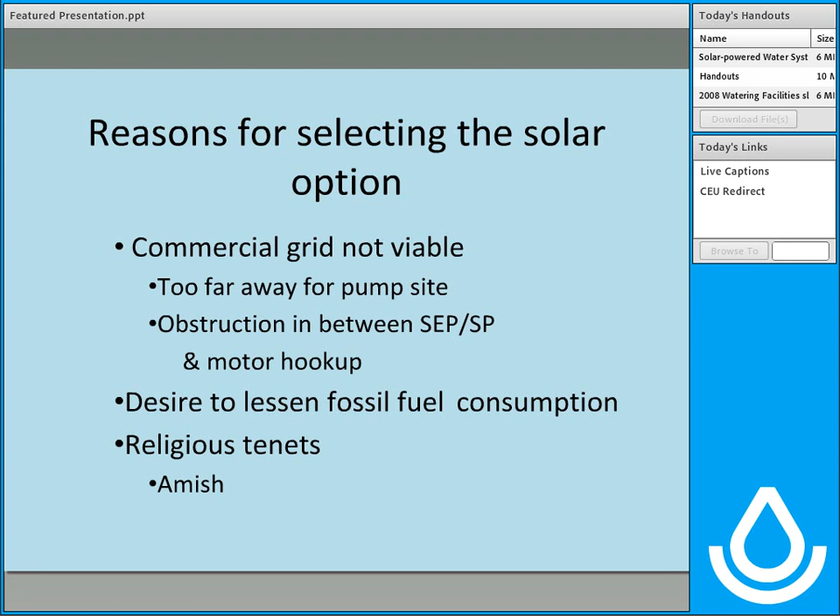Cost break point was about 1/3 to 1/2 mile from the grid back in 2004 for New York State. Depending on what the prevailing electric rates of the local utility that serves your farmers, the capital expense of conventional pumping or gravity feed options, and the cost of solar-powered alternative, a cost analysis can reveal the economics of that particular option.

There are a number of key points that I want to make right at the beginning. First of all, like so many of the other alternative ways of providing water to livestock, but particularly with solar, it's much more costly than traditional approaches. Also, in particular with solar, we only have a relatively brief window of opportunity in which to capture that energy and make use of it.

So with the cost and some of the other challenges that face solar, it would be worthwhile to explore the more traditional options where they can provide livestock water on at least some of the acreage in the grazing system, and reduce the need for solar as much as possible.

Because solar is heavy on the technology, there's always things that can go wrong. And with that in mind, just as with other problems on a grazing system like drought or flooding, having a contingency plan for when the system is down is certainly worthwhile.

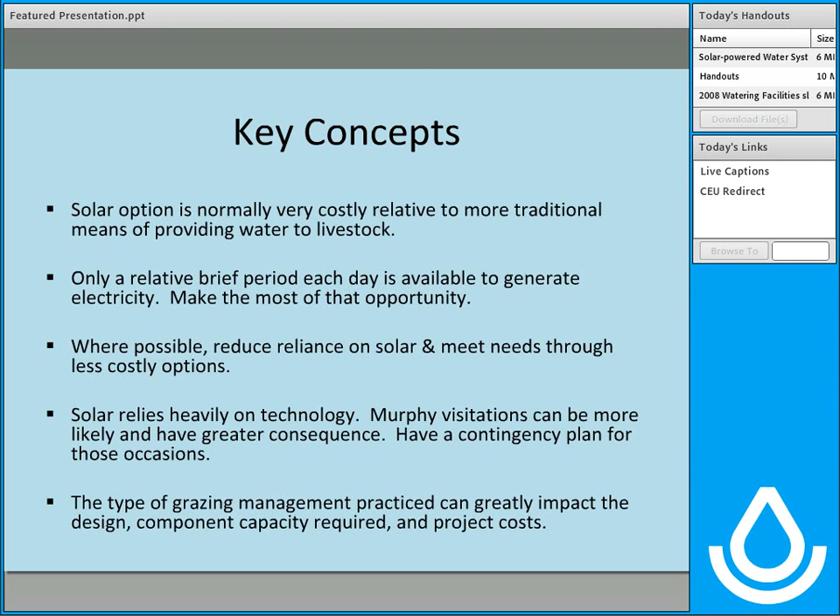Kevin will get into this in more detail, but recognize that the type of grazing management that is practiced really impacts the design, component capacity required, and the overall cost of the solar option.

Trying to find a suitable site for a photovoltaic array takes a lot of things into consideration. Perhaps the most important is finding a spot that's unobstructed to the south horizon. Obviously shade on the photovoltaic array is a major problem. Whenever there's some shadow cast on the surface of the array, that reduces the overall output.

Another issue to consider is the exposure, or the amount of wind that might be expected at that site, because wind on the array puts a lot of mechanical stress, which leads to premature failure due to fatigue. In addition, the distance between the array siting and where the actual pump is placed is also important due to avoiding voltage drop in the wires.

Most of the time it's a DC powered motor, and with DC applications, voltage drop is a major consideration. Unfortunately, due to the required exposure and prominence of photovoltaic arrays, they become easy targets for foul play. Finally, the photovoltaic array mounts mandate a solid foundation to keep proper orientation to the sun, so soil characteristics like depth to bedrock or other restrictive layers can make this problematic.

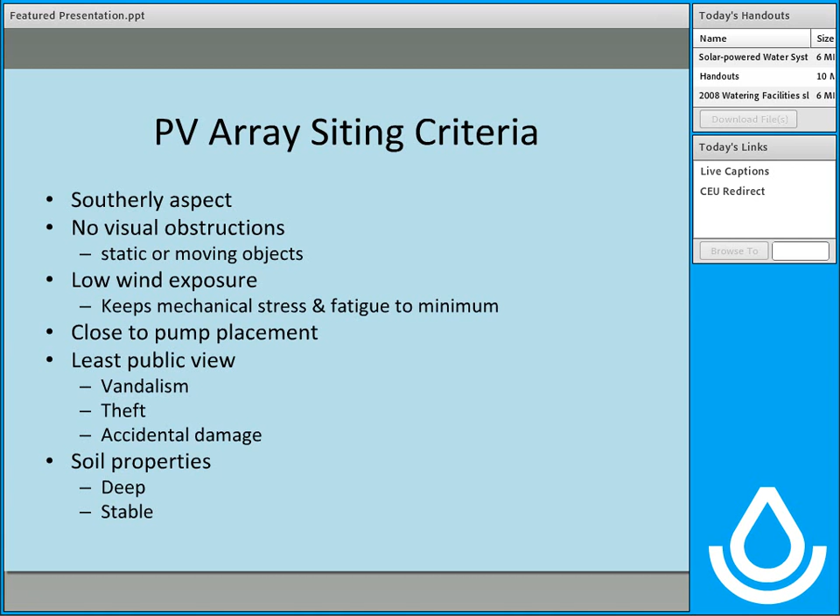As far as positioning the array, you want to try to have the surface of the array perpendicular to the sun as much as possible and as consistently as possible. So there are two considerations there: one is the elevation, sometimes called the tilt or altitude, and the other is the azimuth or the compass bearing.

There are various ways to position it. Most commonly used is the fixed frame, either on a post, a ground mount, or sometimes on roofs. Those are some of the ways it's actually placed, fixed to a solid foundation.

The angle on a fixed frame usually is adjustable manually, and in the summer for our part of the country, it basically equals the latitude minus 15 degrees. In the winter, you basically add 15 degrees to the latitude. This is the least expensive approach to mounting the panels, but it's also buffeted by winds because of a solid setting.

There are opportunities to have trackers installed onto the array that will potentially increase the output somewhere between 40 and 45%. So the amount of modules that need to be procured to drive the pump may be reduced accordingly. They're not as beneficial in the winter months as they are in the summer months.

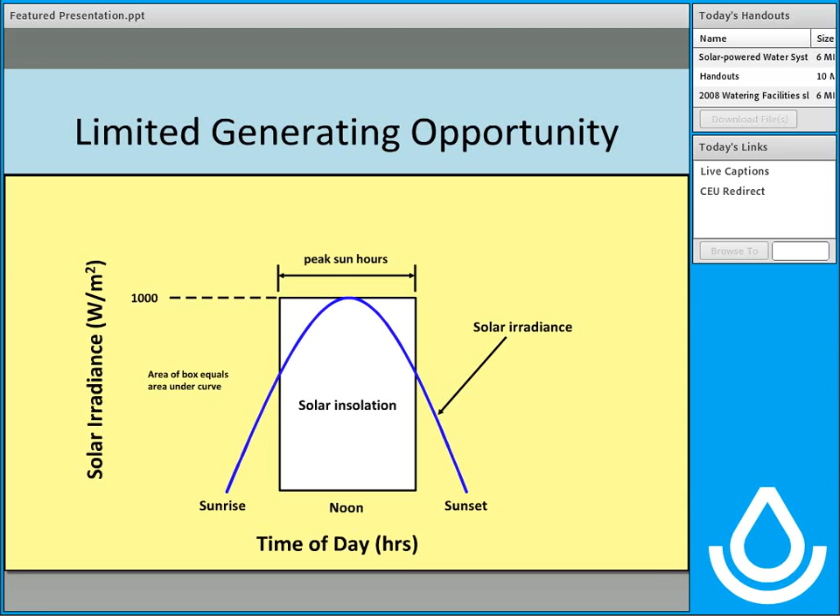This graph illustrates some other concepts to take into account. At any given location, the amount of solar energy reaching the ground or a photovoltaic array on a sunny day varies uniformly in a predictable diurnal pattern. Under these conditions, maximum solar radiation is received.

However, when continuous and uniform cloud cover, considered overcast, filters out the full sunshine, significantly reduced radiation is received in a pattern mimicking clear days, but with reduced output. On days when intermittent or scattered clouds exist, sunshine at ground level is highly variable in intensity and duration.

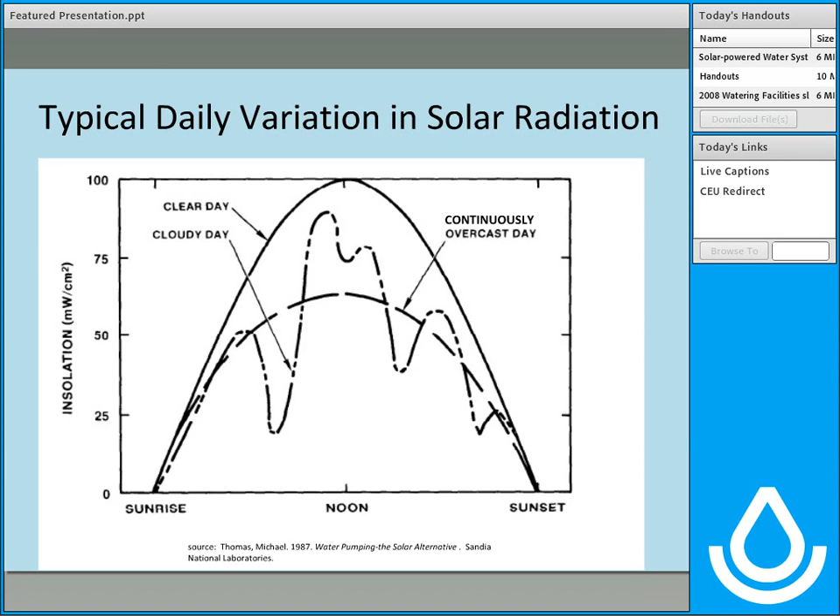The different approaches used have some bearing on the total project, recognizing the limitations of solar pumping. Electric power is only generated for a small portion of the day at best, and at minimum, many hours separate each generating period due to the diurnal nature of sunlight. Cloud cover can further diminish daily accumulated energy reaching the photovoltaic array.

There are two basic approaches that bridge that gap between demand and service. The battery option is one. It has the potential to reduce the size of the photovoltaic array and pump capacity that may be needed. However, it has many downsides. First of all, it is a high maintenance issue.

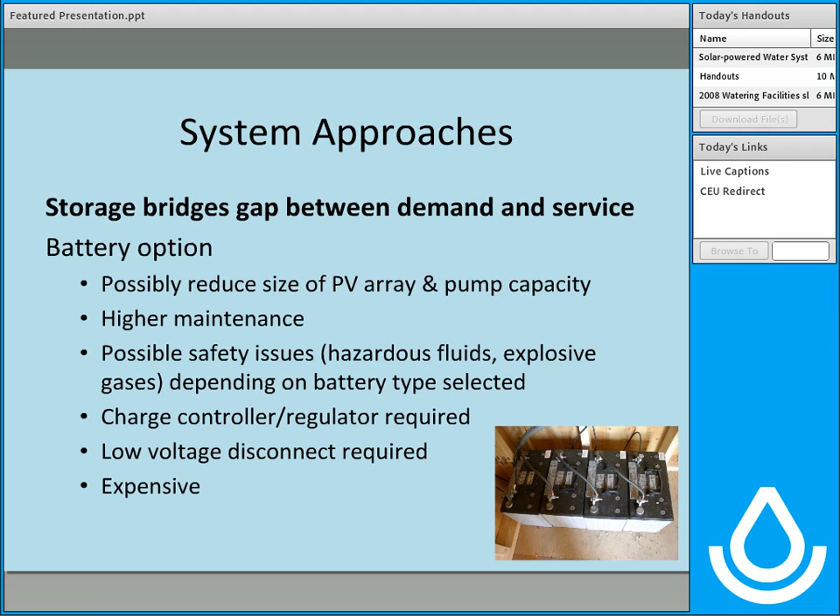There are possibilities of safety issues due to hazardous fluids and explosive gases under certain circumstances. A charge controller or regulator is an additional component required in that situation, as well as a low voltage disconnect item. Overall, this results in a significantly expensive option.

The approach used more commonly in grazing situations is to establish a gravity feed storage tank. That requires the storage or reservoir be positioned very high on the landscape, especially relative to where the dispensing points in the pasture are for offering water to the livestock. That may require significantly more pipe, going up to the storage and then out to the distribution to the various paddocks where water is provided.

Another issue with storage is if sunlight can get through the tank itself, like this polyethylene unit shown here, that may create algae, which reduces water quality, may have health concerns, as well as possibly plug up the float valves. But with all that taken into account, this is a significantly lower cost alternative if the terrain permits.

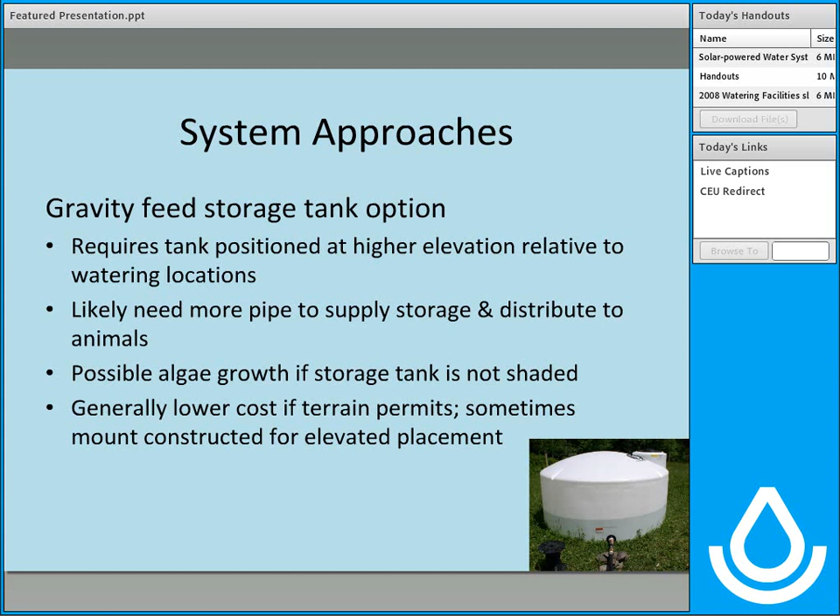In a few instances, when there hasn't been a lot of difference in elevation, the farmers and contractors have actually created a mound to slightly elevate the tank just to get this particular option working.

The duration of service has a significant bearing on the design and construction of a livestock watering system, whether it's a photovoltaic array or a more conventionally pumped scenario. The most common scenario serves livestock only during the growing season, which is simplistic and allows pipelines to be placed on top of the ground where they're not subject to physical damage. However, many graziers are trying to extend the grazing season at both the early and tail ends, which may require extra techniques to get by on colder days. The most challenging scenario is when water is required 12 months of the year, maybe not so much in the south, but in the north where there's freezing weather and snowfall.

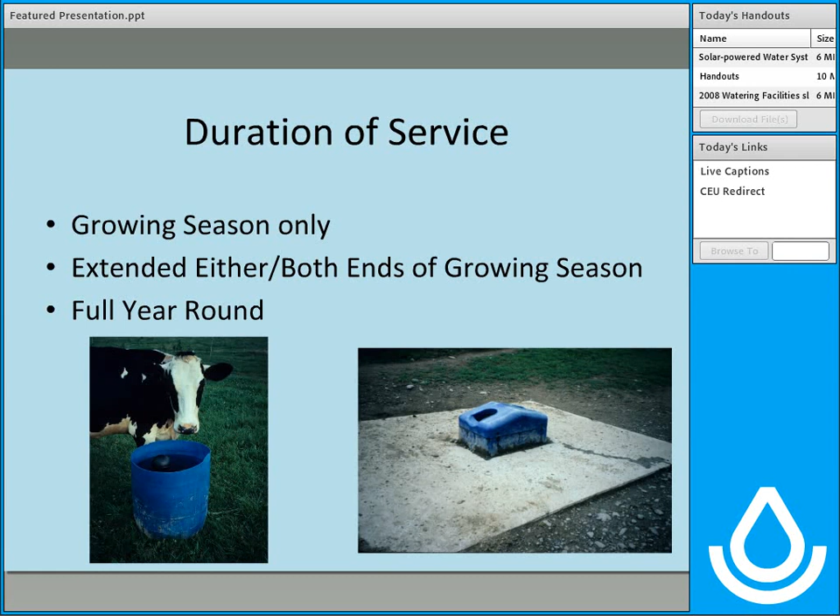There are different components used to activate the pump, turning it on and off as necessary. Perhaps the most common is the float switch, especially when there's water storage. It's a very simple device that sends a signal back to the pump controller when the storage tank needs to be refilled or recharged. Another alternative, more traditionally used in grid-powered pumping systems, is a combination of a pressure switch and a pressure tank.

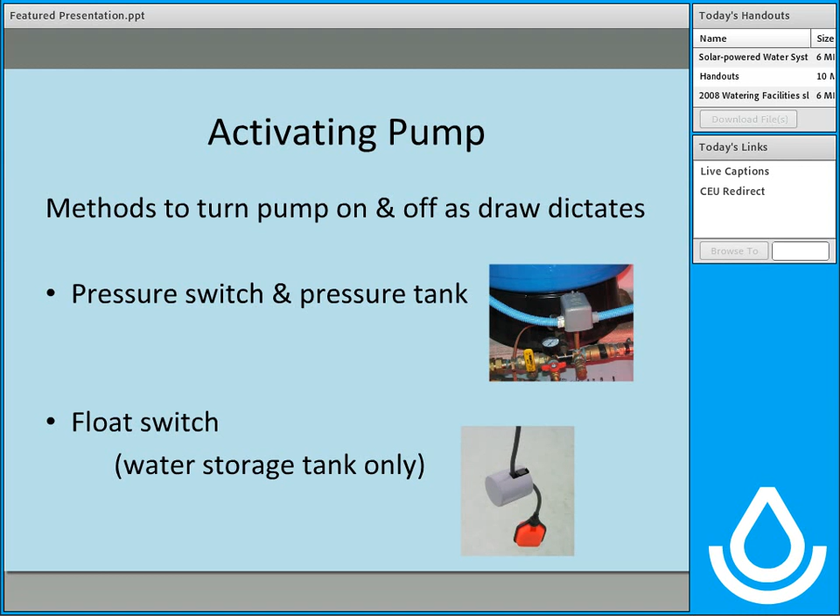Some terms to help familiarize you with components in the industry: the smallest unit of generating electricity for photovoltaic arrays is the individual cell. Those cells are combined into a flat, usually rigid surface called a module. A number of modules may be combined to form a panel, and multiple panels may ultimately create the actual array.

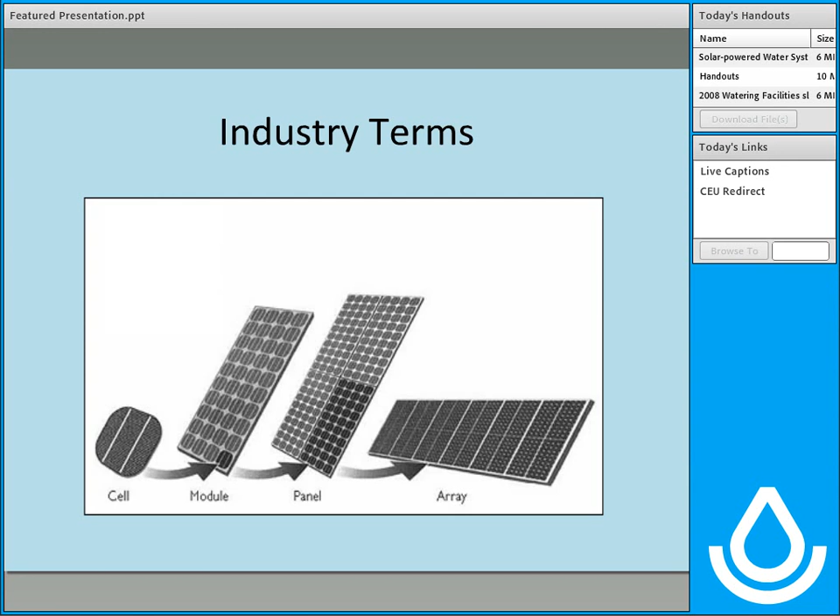The different types of photovoltaic materials are basically in three categories, plus a fourth that's a combination of two of them. The first is monocrystalline, which is the most important because it's the most efficient at 15% efficient—which doesn't seem like much, but compared to the others it's much higher. Multicrystalline is a little less efficient, and then there's amorphous or thin film, which is less than half the efficiency of the others.

Other components you should be aware of include the pump controller, sometimes called a linear current booster, or LCB, by contractors and installers. It's basically an electronic interface between the photovoltaic array and the pump, and it matches the output of the array in terms of voltage and current to the pump to make it work most efficiently.

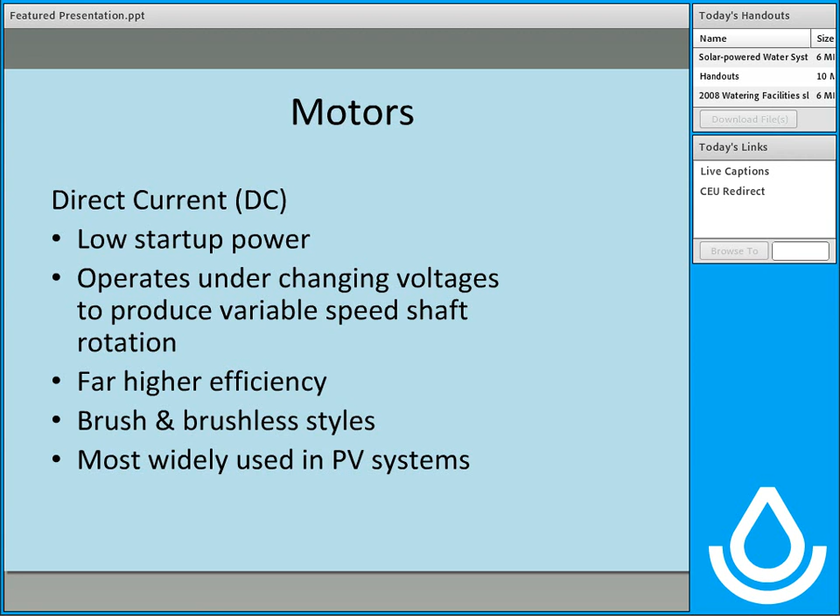The more traditional motor used in photovoltaic pumps is a direct current type motor, characterized by low startup power, operating under varying voltage to produce different speeds of shaft rotation, with much higher efficiency. There are two versions: brush, which requires higher maintenance to replace them as they wear down, and brushless, which is perhaps the more common style in components these days.

The pump environment is basically categorized in two situations. You can have a surface-mounted pump where it obviously has fairly easy access for both installation as well as maintenance and repair. However, depending on where it's actually situated, it may be more vulnerable to freezing damage if it's not protected and exposed to that kind of climate.

It also requires protection from livestock, wildlife, and the elements. When it draws water to the intake port, the suction is limited to basically 22 feet maximum. Submersible pumps, however, are immersed in a column of water, so getting to the unit for installation, maintenance, and repair is more involved. However, it's generally protected from freezing if that's a concern, as well as protected from wildlife, weather, and livestock. And suction is not an issue, since it's right in the column of water.

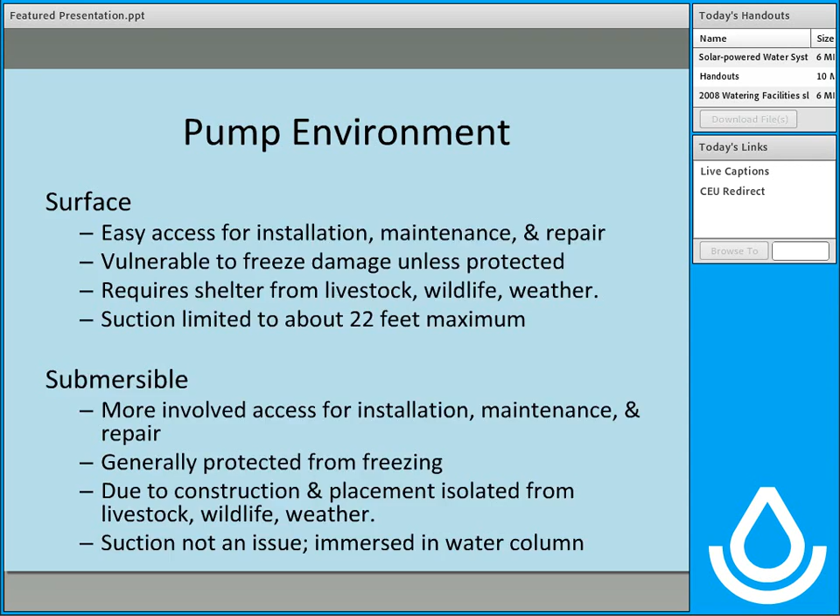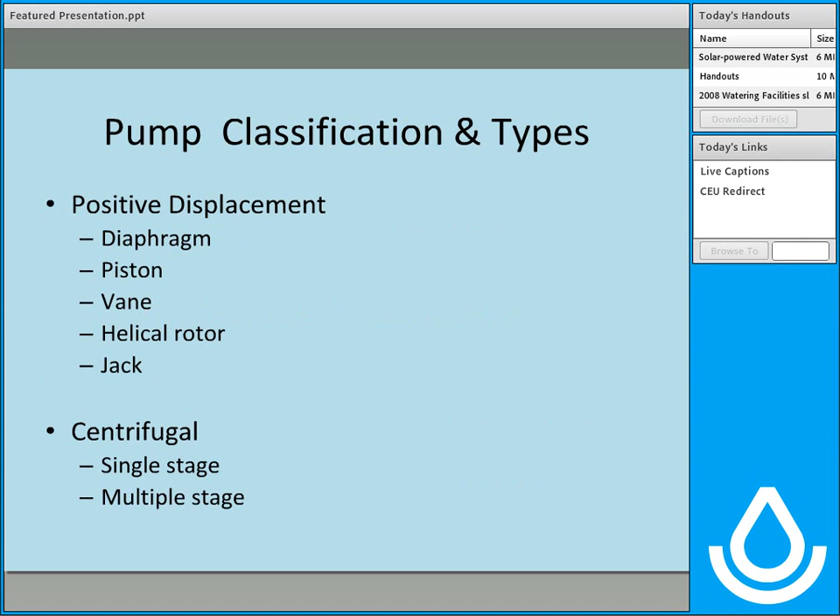As far as pump classifications and types, there are two categories: positive displacement as well as centrifugal. You can see the different pumps that come in through that, and we're going to go through those very quickly.

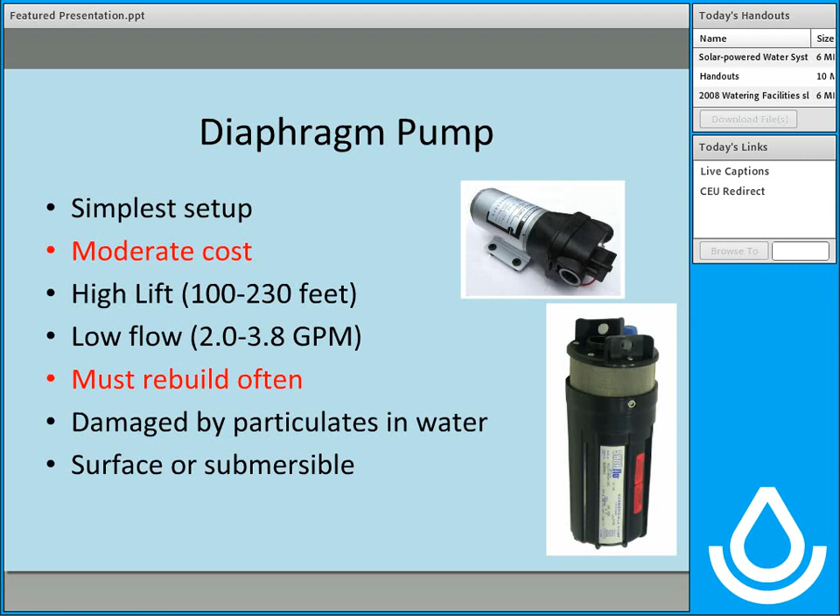For photovoltaic array situations where you're pumping water, a diaphragm pump is perhaps the simplest setup. It's moderate cost, and one of the major drawbacks is the diaphragm, because there's a lot of fatigue on that component. It has to be replaced, so you have to rebuild that portion of the pump very often, normally every 1 to 2 years.

A piston pump is another option for positive displacement pumps. These are significantly higher cost than the prior option I mentioned. However, they are very durable and reliable, with a great track record. They're also very tolerant of dirty water, and of all the pumps available, they are the most efficient in terms of moving a gallon of water with a set amount of energy.

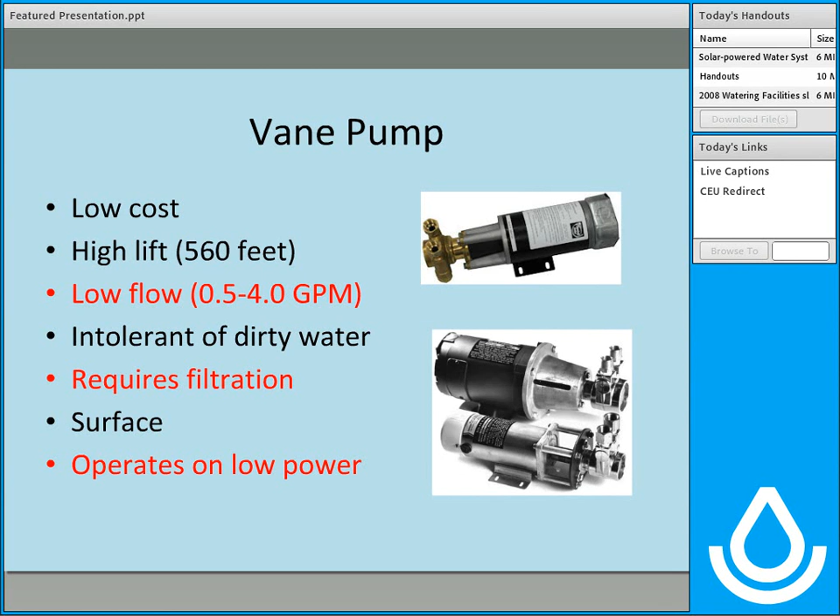Vane pumps have the characteristics, unfortunately, of very low flow but fairly high lift. One of the major other drawbacks is that it absolutely requires filtration - it's extremely intolerant of contaminants, sediments, and particulates. On the positive side, it can operate on very low power when you have a cloudy or overcast day.

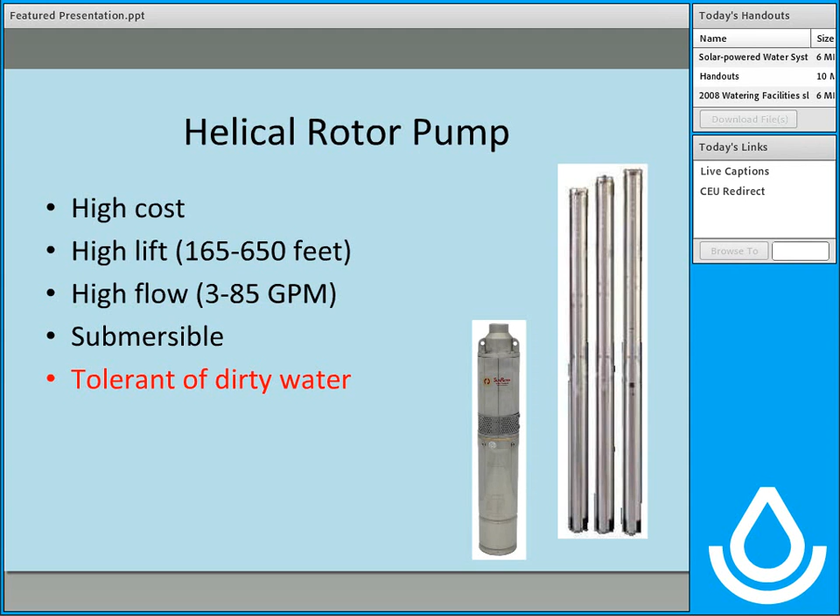Helical rotor pumps are kind of unusual for normal pumping situations when connected to the grid, but they're actually fairly common in photovoltaic situations. They allow for a very high lift and pretty good flow. They're tolerant of dirty water, and most traditionally they're offered in submersible versions.

Centrifugal pumps are moderate to high cost. They have fairly low lift, but one of the things where they shine is very high flow. Unfortunately, on the flip side, they're fairly low in efficiency in moving water relative to the amount of power provided.

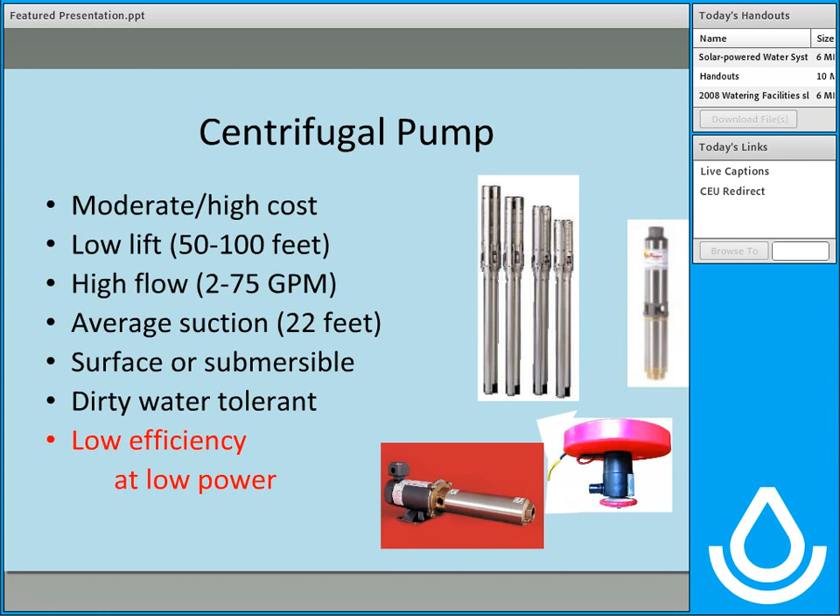Lastly, I cannot overemphasize the O&M aspects of any conservation practice, but in particular for photovoltaic pumping stations, there are some extra features to consider. One is, of course, trying to avoid reduction of sunlight getting to the photovoltaic array. When you have accumulation of dust, foliage, or other debris on the surface, over time that will dramatically impact and lower the output of that array. So consistently cleaning that is ultra important.

In addition, inspect all the wires and cables for any potential damage, and make sure all the bolts and other fasteners are tight on the frame or the tracker, because if they're not - due to wind or some other impact - the unit is not operating at top performance.

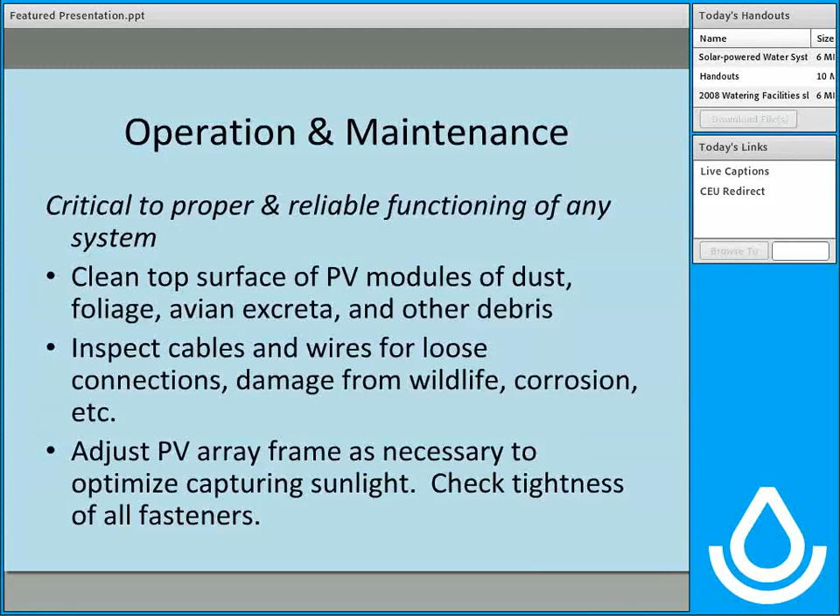When do you need fixed tilt, and does that change during the growing season, or just from summer to winter? The question, if I understand correctly, is basically about the passive tracker and how it works.

There are these wings on either side of the mount for the array, and behind them, just below the wing, are cylinders filled with fluid. They're plumbed and oriented so that as the sun shines on them, usually on a black surface, sunlight hitting the dark surface changes wavelength and heats up that container of fluid. As it heats up and expands, it moves through the plumbing to shift the weight of the array from one side to another, automatically tracking the sun.

That, however, is a single-axis type of tracking. It's not a double-axis. It will only track the sun throughout the day, from sunrise to sunset.

Is it the tilt—orienting that to the sun in summer versus winter, or would you want to vary the tilt during the growing season? That would certainly optimize the capturing of sunlight onto the array. Depending on the particular array, on a fixed mount it can be somewhat involved, but the more often you could do that, maybe every month, would be beneficial. At the very minimum, do it at either end of the season.

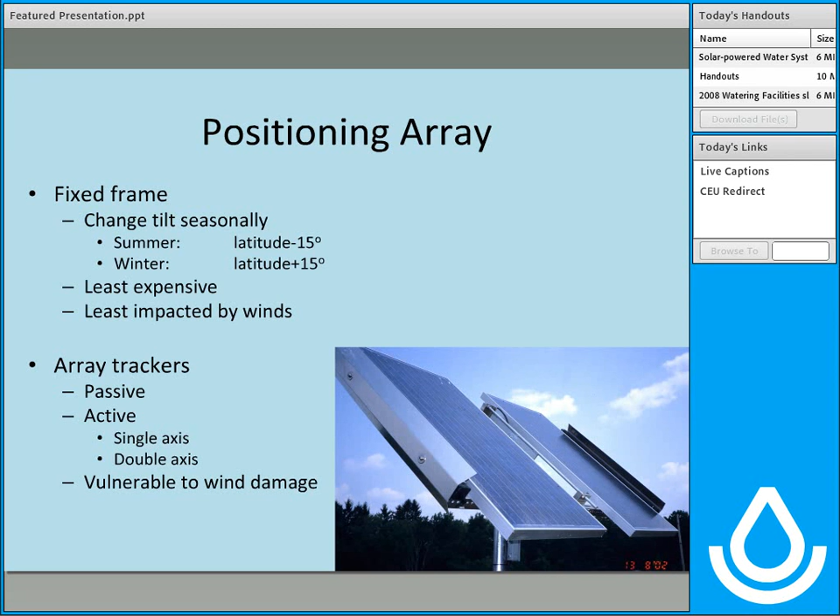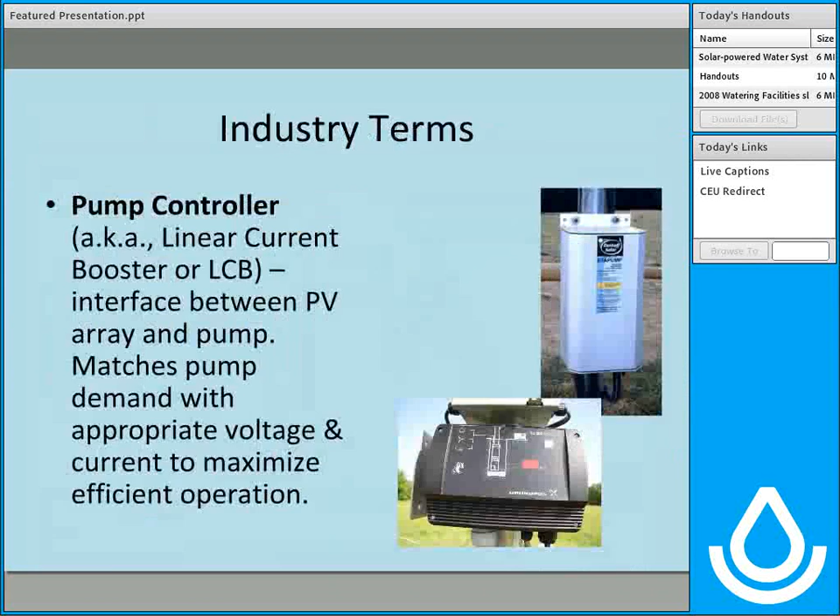Okay, a couple more questions. We've had a lot come in, trying to pick out some connected ones. So, regarding the number of hours per day you could count on sunlight producing enough energy through those PVs—if you had a fixed array, would that give you fewer hours of operation versus one where you could vary the tilt, even during the growing season?

Maybe not so much fewer hours that it would pump, but it's the output of the pump itself. Early and late in the day, the angle the sunlight strikes the array surface, if it's in a fixed mount position, obviously isn't as great as at noontime. So the panel will produce some output, but nowhere near what you have at high noon, and the pump will operate, but not at full capacity. That's why tracking usually increases the total output during the day versus a fixed mount setup.

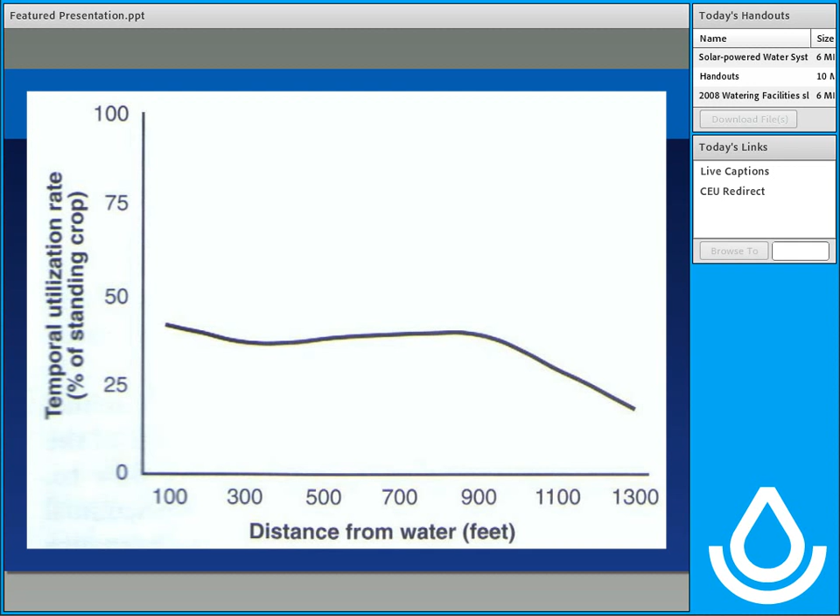There's also some studies done on dairy with GLCI funds that showed those impacts with lactating dairy cows, that distance is probably much shorter, in the 400 to 500 feet range, since those animals need a lot of water. So those are really important facts that we need to keep in mind as planners when we're doing design work.

If we stay within these distances or less, 2 to 5% of the herd is going to come at a time, and we can calculate that, and Jeff's going to go through an example here in a little bit. If we're greater than those distances, we're going to have a lot more of the herd coming at one time. There's been documented cases where, if you get far enough away, the whole herd's going to come to the drinking water source. So obviously, how many animals are going to be drinking at a time is a big impact on our design.

So here's, again, some facts we've shown before. We can figure about 6 gallons per drinking event. We want to stay on the high side in our calculations, and there's 2 to 5 drinking events per day, so we might have 30 gallons per head per day that we would need to supply.

We've shown these in past slides also. Just want to make sure you take into account all of the water that the animals are getting, and it's not unusual for them to get quite a bit through the grazed forage. There was actually a study done where the animals got as much as 12 gallons per head per day just from the forage, and there were actually days in May and June that certain individual animals never came to the water tank because they were getting plenty of water otherwise. So we just need to take into account all of the water.

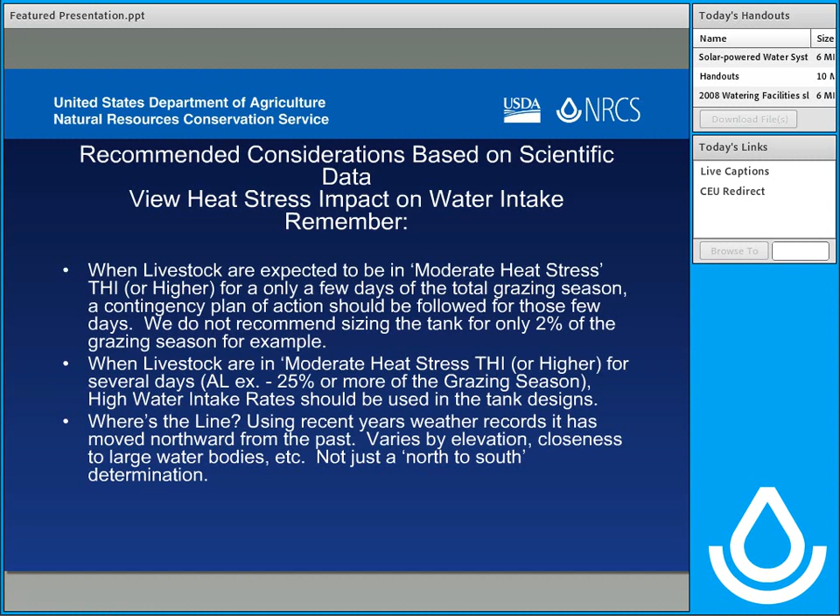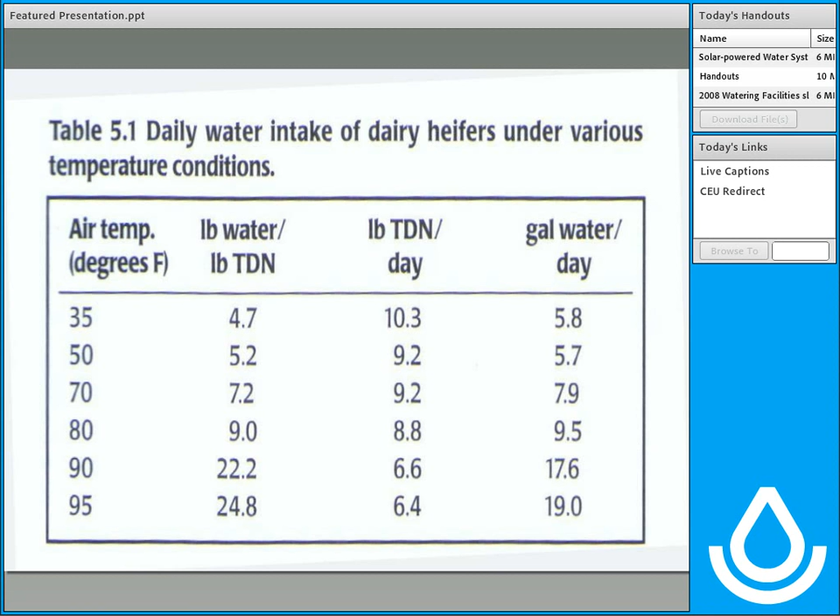Versus the 90 to 95 degree Fahrenheit range, with typically high humidity at that time too, you can see that the gallons of water those animals need per day more than doubled. So it's a very important factor on how often those animals are going to be in heat stress.

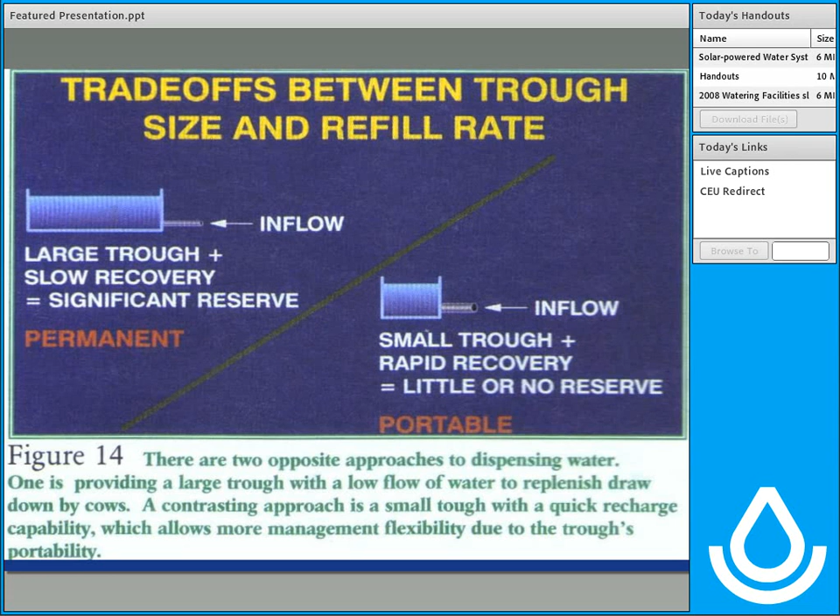Just emphasizing that if we're going to have a large tank, we can have some reserve in that, and we can have a little slower recovery time. And that, as you'll hear Jeff go through in a minute, helps with some of our solar systems. Versus a small tank, then we need a rapid recovery so it can refill quickly, and it won't have hardly any reserve. So we have to be able to put a lot of gallons per minute into that tank quickly. That's a factor when we think about solar.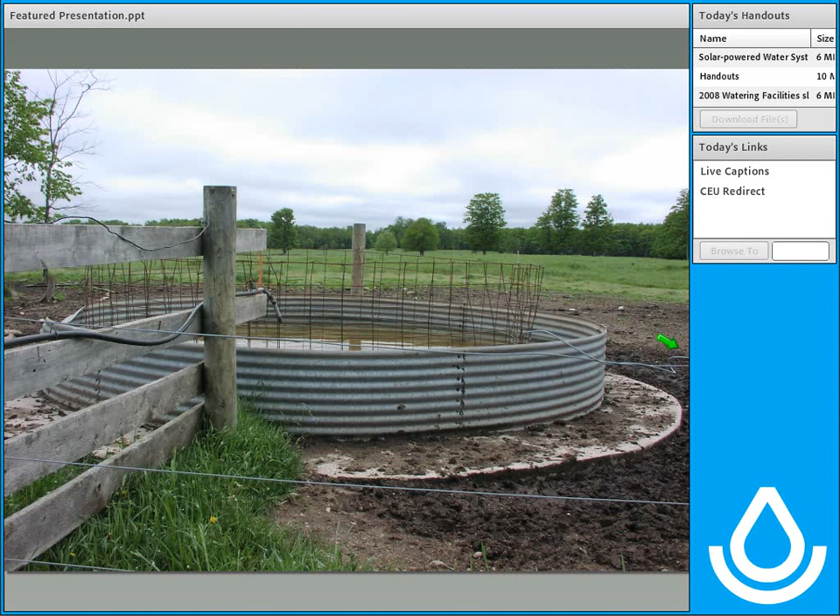So this is just a small tank that'd have to have a quick refill versus a large tank, which we would typically see as permanent tanks. And in this situation, regardless of what our energy source is, when we do large permanent tanks, we really need to be aware about what's going on off the pad, if there is a pad. Anytime we go to bare earth, whether this pad is 3 feet wide or 10 feet wide, we usually create a resource concern where we may not have had one earlier. So it's an important consideration in planning.

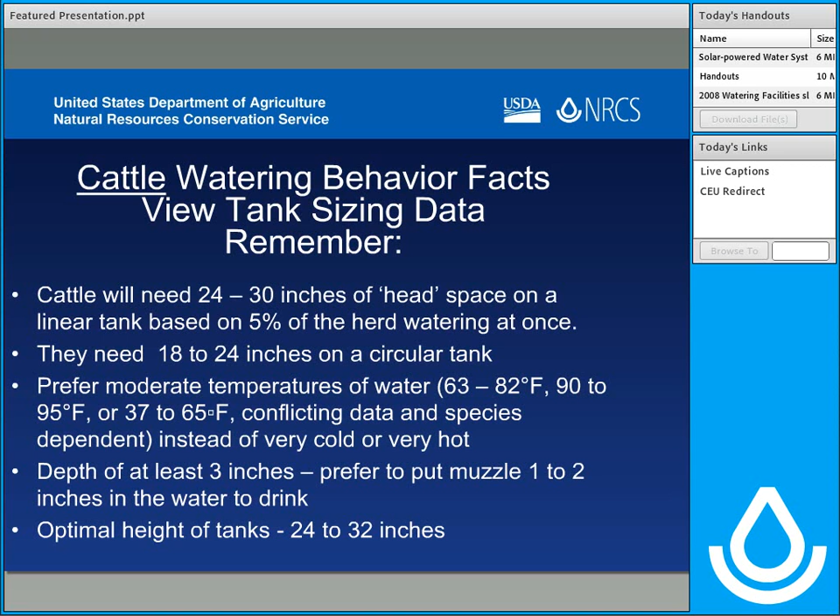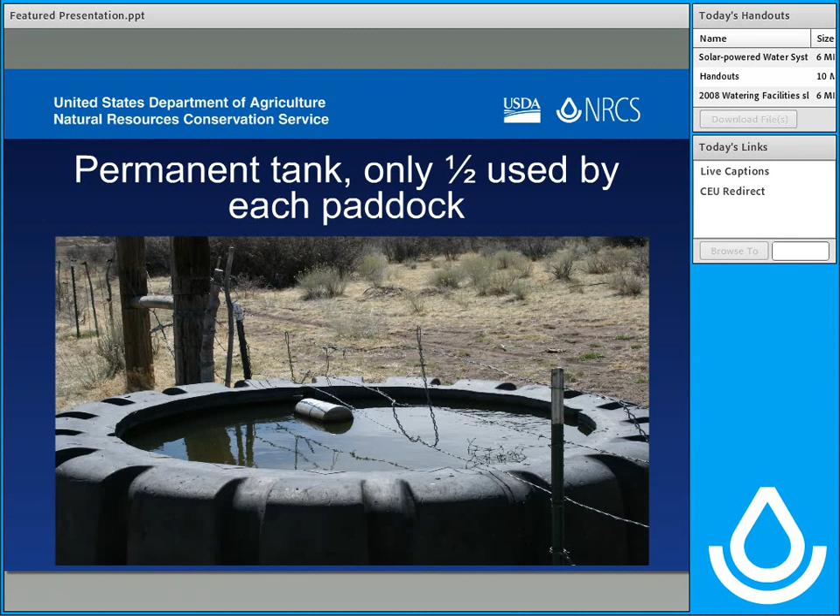Sometimes that gets overlooked. Kevin Kaya sent me this picture from Vermont NRCS, and I appreciate him giving me that picture, but this is just showing a dairy operation. Again, if this is designed this way for just a couple of cows to drink at a time, that's fine. If it wasn't designed that way, then we need to figure out what we're going to do. Are we going to push this tank further in, or do we have to get a different tank to supply what those animals need?

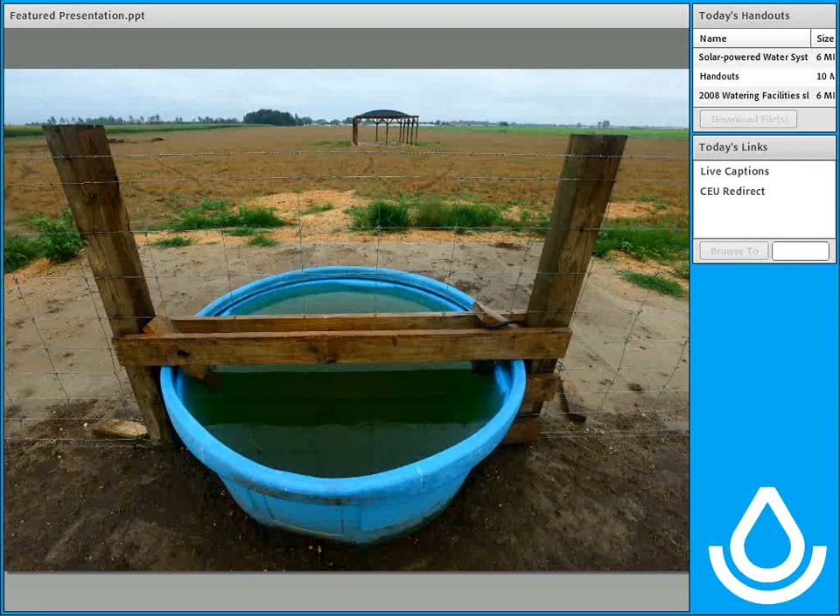Same thing here with this operation. We could slide that tank further into one paddock versus the other if for some reason it wasn't planned on just a few animals drinking at a time. Same thing here with round tanks, just an important consideration. We see this sometimes where a permanent tank's been put in going to a 4-paddock system, which is great.

That's good livestock management. But when we do that, we have to make sure that when these animals are in one of these paddocks, they only have a quarter of that tank, of the perimeter area to drink from. So is that what we planned on for that system?

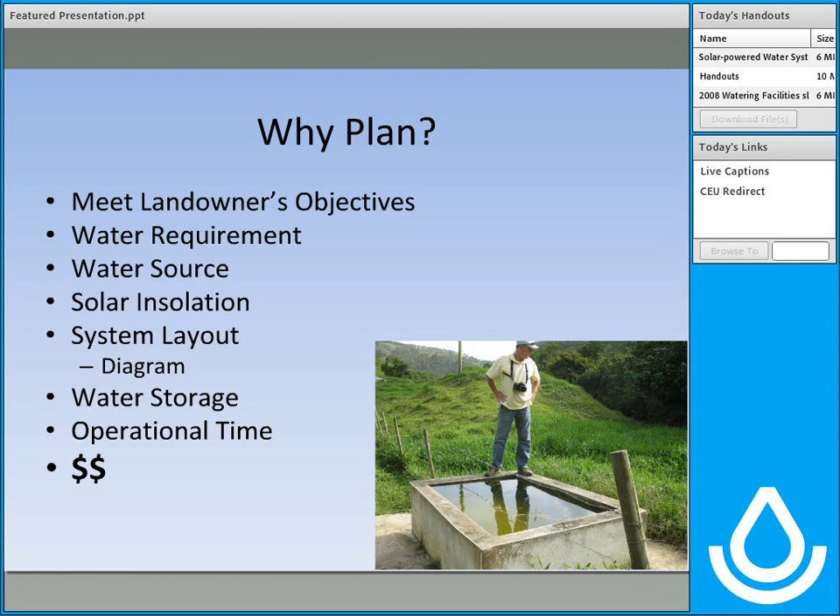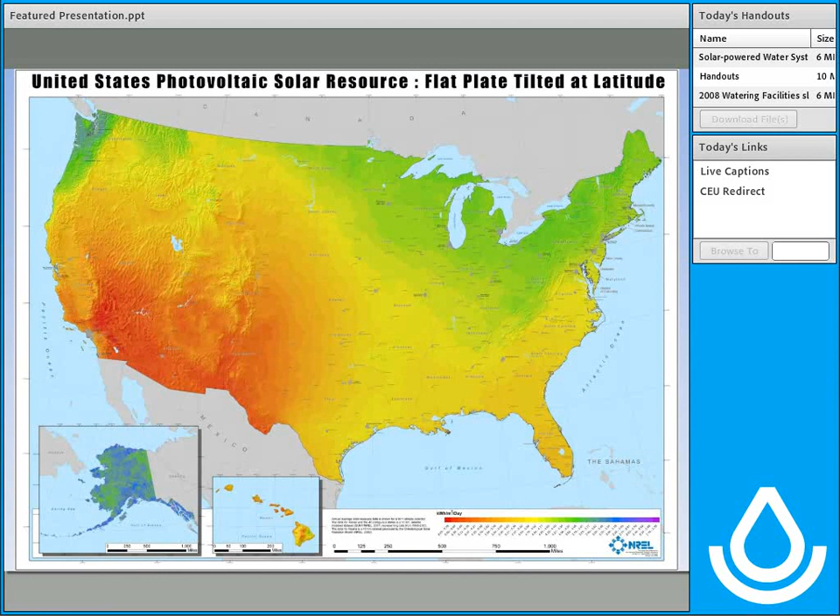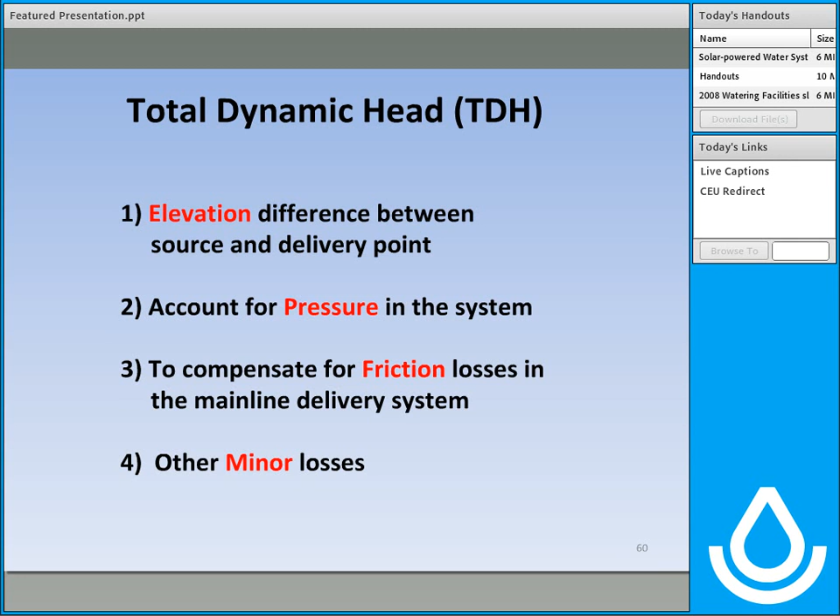Now, the presentation done by Bill Reck and Kevin Ogles back in 2013 covers this information in much greater detail, and I would encourage you to take a look at that if you're interested in some of those design features.

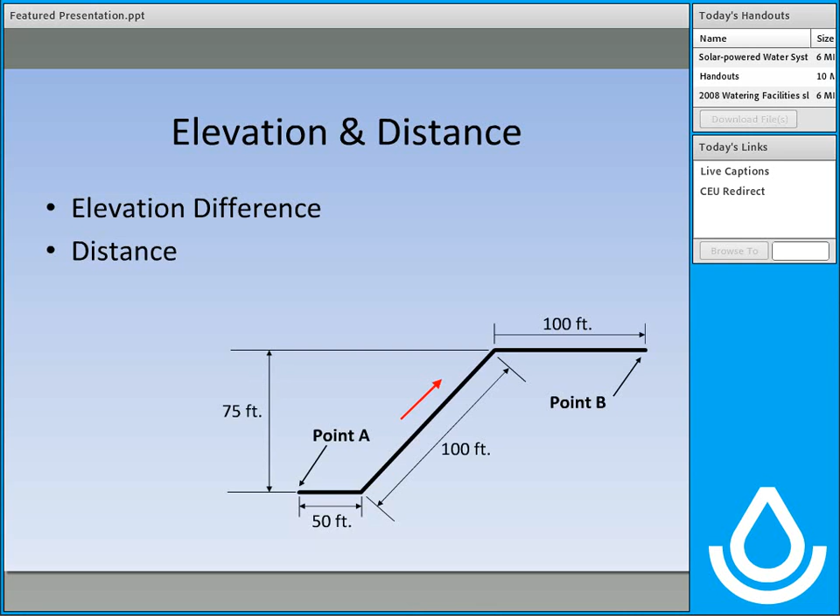Again, looking at the elevation distance, this just kind of gives you a brief summary of what we're looking for: how much rise do we have in elevation, and then also how long is the pipe to meet the requirements for the particular system.

When we're looking at losses, the friction losses, basically what kind of impacts are we having on the velocity within the pipe? We have different factors to look at. How big is that pipe? The larger the pipe, the lower the losses.

What type of material is actually being used? How long is the pipe? The longer the pipe, the more losses and more friction we have within there. We're also dealing with things like fittings and valves, which introduce additional losses within the system, and those have to be taken into consideration when designing these systems.

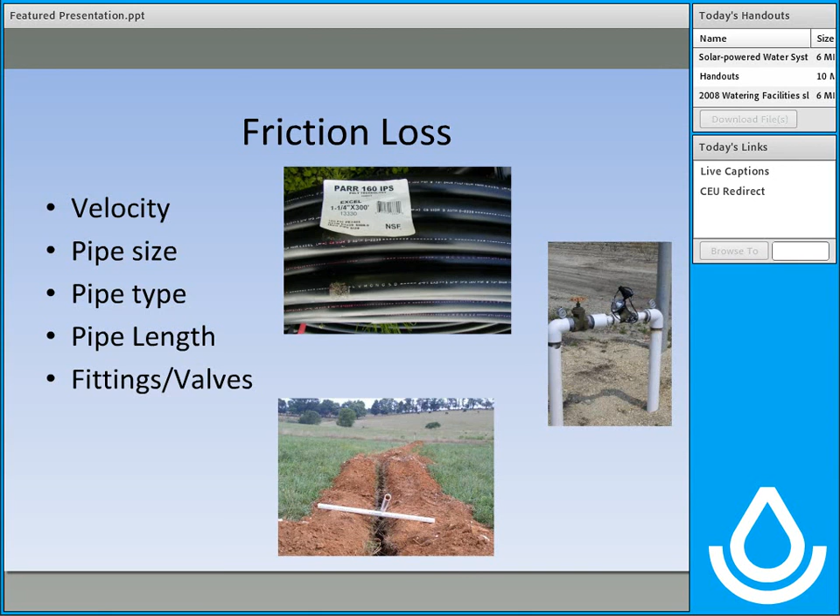Now, from animal water requirements, flow rates can be determined, and we're going to be looking at an example here in just a few moments. Once one knows the flow rates, and once one can determine the total dynamic head, you can use pumping curves such as these to determine which pump will work best for the system.

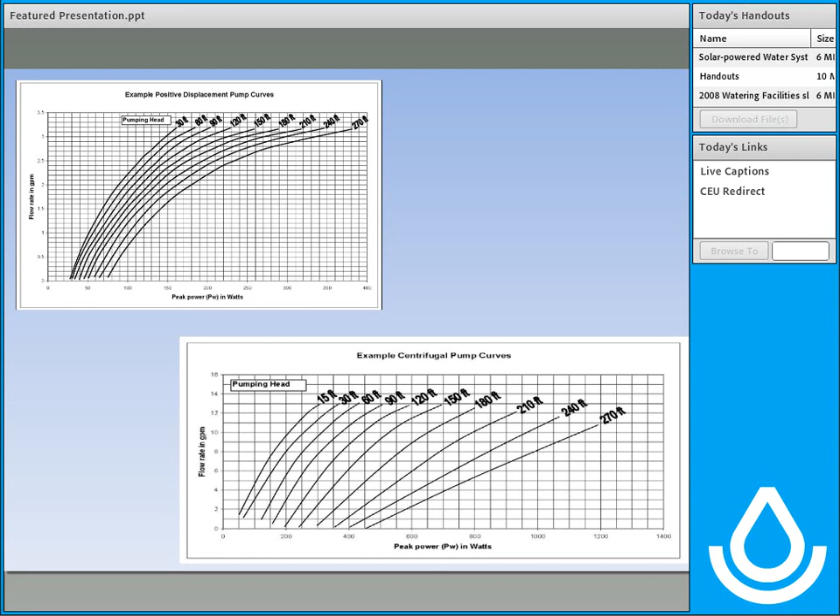So here, now we've got the basics. What do we do with it? That's a good question, so let's just kind of take a look at this example.

For this example, we have a 100-head beef cattle operation. The cattle have currently been using the stream for their watering source. The landowner wants to get the cattle out of the stream. This is located in Syracuse. The landowner would also like to see if, once you get the water into a storage tank, gravity feed could be used. And also, can we do the majority of the design handling a solar system? That's what we're going to take a look at in this short example.

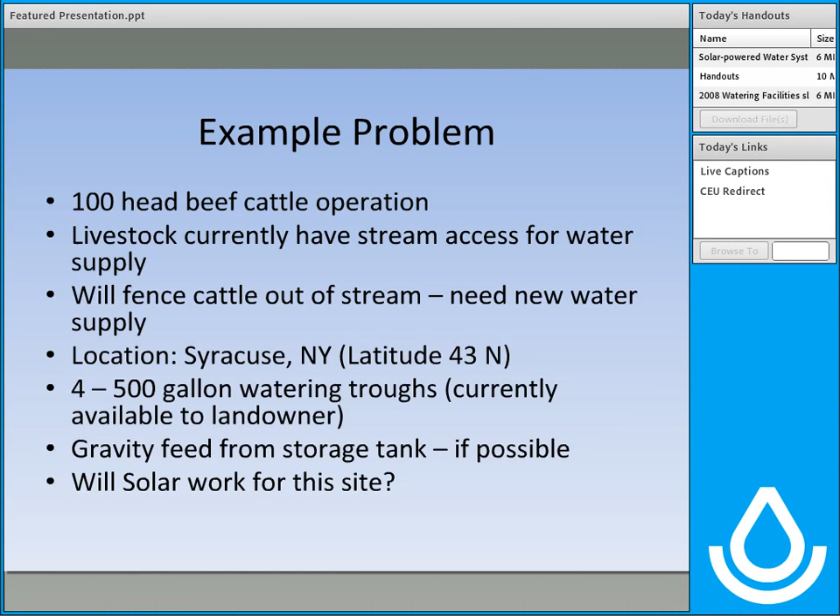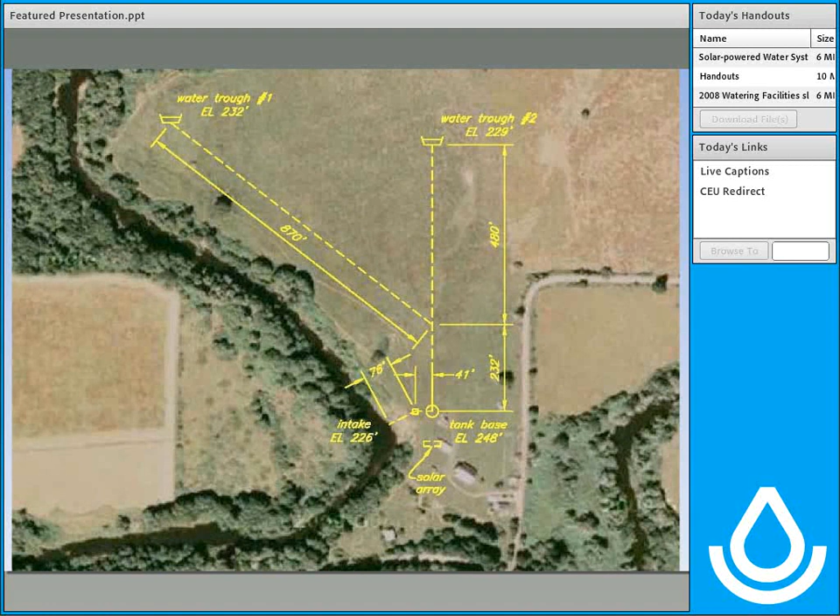Here we have the site, and this shows the location of the water source. It shows the location of the storage tank and 2 of the watering troughs. Information obtained from a diagram like this is invaluable from a planning standpoint, especially when we're doing these livestock watering systems. It gives us a good visual and an idea of some of these lengths, elevations, those types of things. So I would strongly encourage that you diagram out your systems.

Now, it was determined by the landowner for this operation what the water requirements were for these animals. I want you to notice the differences between the water requirements from July and November. Also note the water intake requirements for very hot and humid days. All of those are going to come into play when we actually do our designs. We can't just take one number and run with it; we have to look at all these other things and consider everything when preparing a design.

Also notice that one of the things they tried to achieve from a conservation standpoint is to have 3 days of storage, just in case the system would happen to be down, we would have additional storage. So in this case, we're going to have a 4,000-gallon tank to store that additional water that's going to be needed.

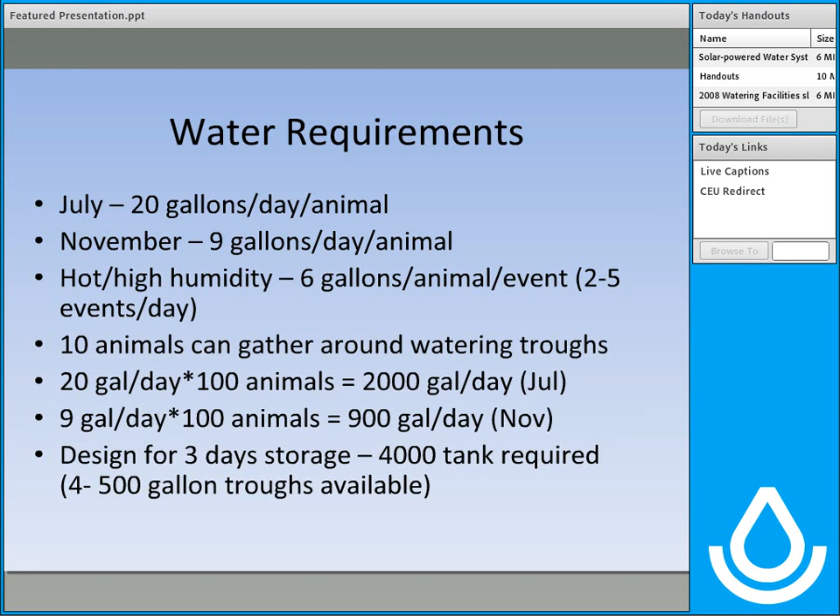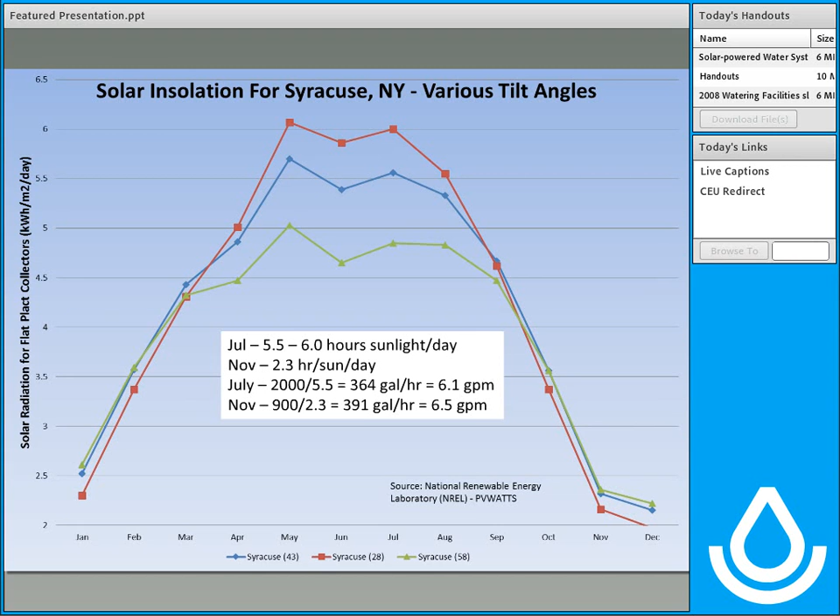Note that the flow rate requirements for November are actually greater than July, even though water usage is less than half of that required in July. That's because of the limited amount of solar radiation available for energy generation. Now, these higher flow rates may have an impact on the type of pump that can be used for this operation. I'd refer you back to what Rob was talking about regarding what kind of pump you might want to look at for your particular case.

Now let's look at these pump requirements. Using the previously computed flow rate for July, we're looking at a system that will be used just during the growing season. When we use the other parameters, we can determine what the total dynamic head would be so we could select the pump. I know some are getting glazed over by the numbers, but if you go through the process, you'll begin to understand how this works.

So we find out where the tank is stationed, at elevation 248. We need to add the height of the tank, so that's another 11 feet. Then we subtract the elevation of where the water is, which is 226. When we do that math, we come up with 33 feet.

Now we need to determine if we're going to pressurize the system. For simplicity reasons, we're not going to pressurize this system, so there'll be 0 for that part of the total dynamic head. Then we need to look at our friction.

We're going to estimate about 200 feet of pipe, and we'll add 10% for minor losses - again, from a simplicity standpoint. We go into our appropriate tables and figure out our friction loss, which in this case is 5.2 feet. So we add the three numbers: 33 plus 0 plus 5.2. We get just over 38, so let's use 40 feet.

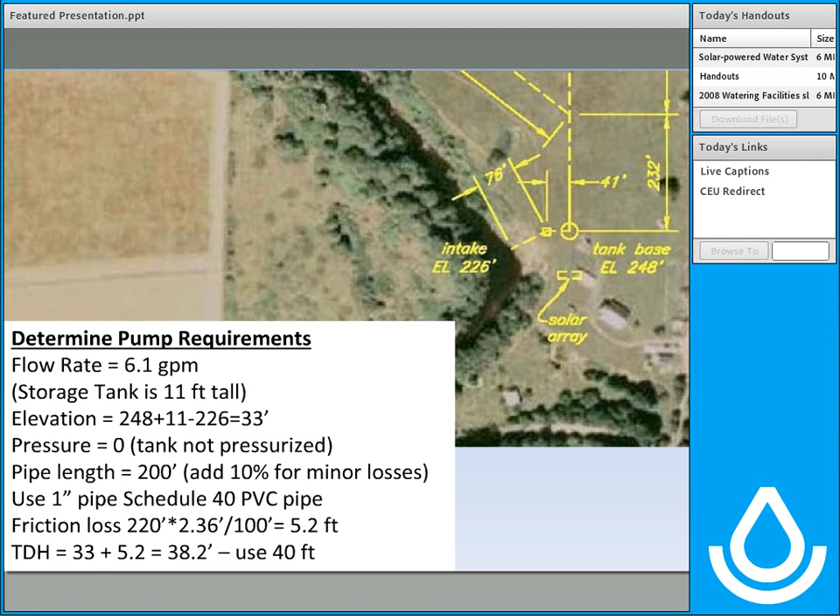So now we know the flow rate required, and we also know the total dynamic head. Based on that information, you can go into your pump curves and evaluate what power requirements would be needed to run your PV system. In this particular case, the system would require about 170 watts to run.

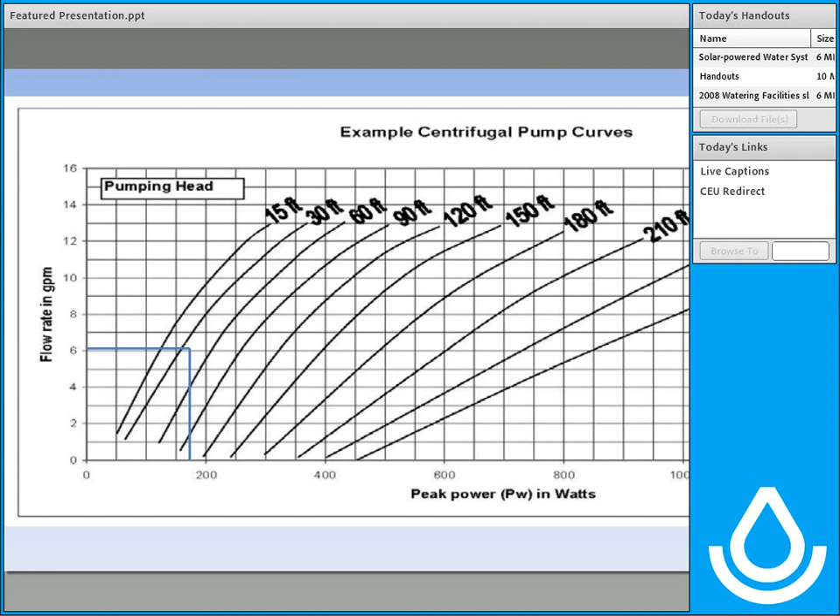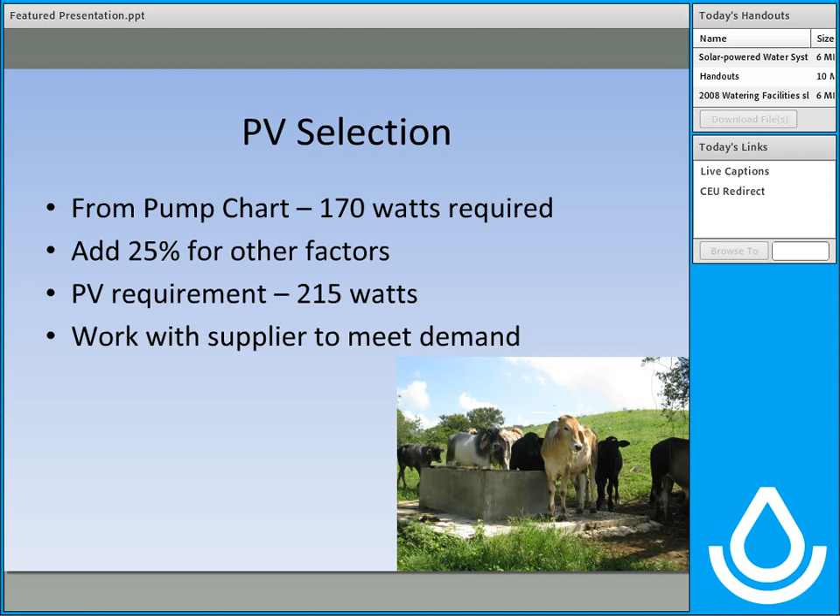One recommendation is that due to environmental factors such as dust, and wear over time, they recommend adding about 25% so the system will perform over a longer period. When you do that, it raises the PV requirements up to about 215 watts. Based on this, the landowner needs to work with the supplier to find the array that would meet this configuration and the pump requirements for this particular system.

So now we've designed the system from the water source up to the storage tank - that's where the PV system has now been designed. Now, since this tank is located on a hill, the landowner wanted to check and see if the water could be distributed to the troughs by gravity, or if we're going to have to add a pump, or additional PV arrays to get the water to the facilities. This is going to have to be evaluated.

Another thing the landowner mentioned: with the high temperatures and humidity during July, he wanted to make sure that during peak water usage events, when cattle consume about 60 gallons of water, they could replenish that 60 gallons in about 30 minutes. So that sets another limiting factor - we can't just look at 6 gallons per minute for the entire system. We now have to get this water and replenish that amount within 30 minutes.

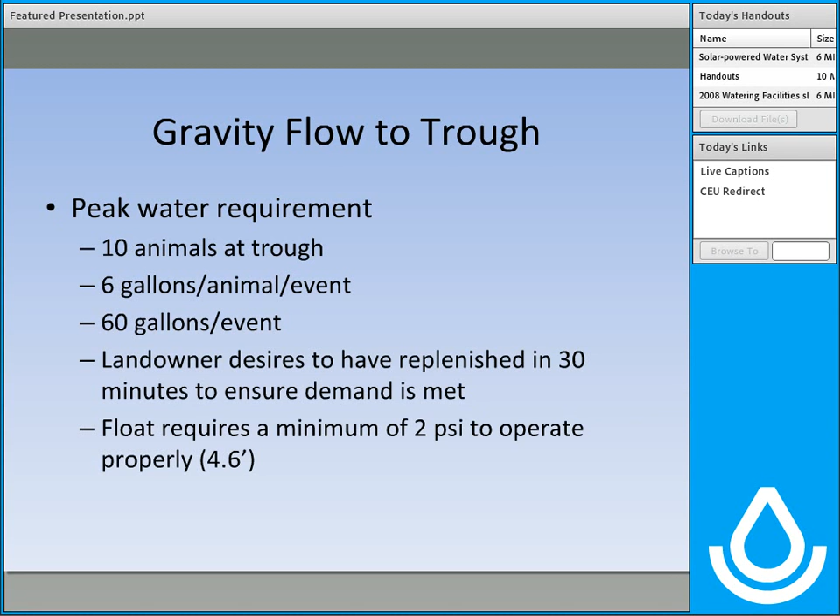Another item to take into account is that when you have a float, many of those floats require some type of pressure to make sure that they're operating properly. For the floats used in this system, they're going to require 2 PSI. Now, when you convert PSI to feet, which is what we generally work in, you multiply that number by 2.31, and in this case we're just going to round it to 4.6.

The calculations on this slide I know are very busy, but I'm using this information to help us understand the process one would go through when designing a system.

To make sure that we meet the requirements of 60 gallons in 30 minutes, we need to get 2 gallons per minute. That's the replenishment rate, and the float pressure is 2 psi. So we set up our equation just like before, similar to the total dynamic head calculation, and you would determine the pipe size that would go from the storage tank down to, in this case, the most distant watering trough.

What we've done here is assume that the large tank is nearly empty, so that's where the half foot comes into play, where I have elevation 248. That's the elevation of the ground at the tank. At a half a foot, that's a very conservative number saying the tank is almost empty.

That is going to equal the elevation of the watering trough plus the pressure at the watering trough plus the friction losses within the pipeline. Now that pressure at the trough, that's what we're trying to find. That number needs to be greater than 4.6, and if it is, our system will function.

I evaluated both a 3/4 inch pipe and a 1 inch pipe for this. Because of the smaller pipe, it had too high of a friction loss, much larger than 3.4, and because of that we could not use a 3/4 inch pipe, so we had to use a 1 inch pipe to meet the 2 gallon per minute requirement.

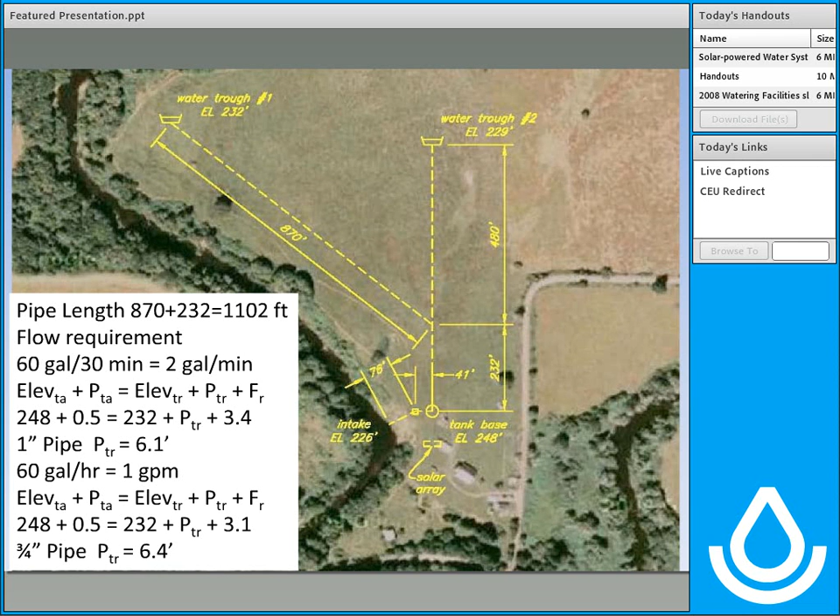One of the things we need to understand here is that there's much more planning required than just doing the PV system — that's just a small part of the system. If you want to know more about this process, I'd encourage you to read this document, one of those attached, entitled Design of Small Photovoltaic Solar-Powered Water Pump Systems. That's included in your handouts, and I'd really encourage you to take a look at it to help you understand the process a little more, because I jumped through this really, really fast.

Another thing I wanted to mention is a couple of references you might look at. There's a program called AgPipe — if you're with NRCS, you'll need your IT folks to help download the software. If you're a non-governmental individual, you can download it directly at the web link provided. I also know many states have spreadsheets for designing pipelines, so I'd encourage you to look at those and get a good understanding of them. Also, in the engineering field tools, we're eventually going to have a pipeline component added, but as of today we're waiting for funding to complete that work, so it'll be a little bit of time before that comes out.

Now, the other one I wanted to mention was PV Watts. The calculator — I used a lot of that information to show what kind of solar insolation you have at various locations. You can input that data, and it will give you that information. So it's really a very good tool.

So as I bring this presentation to a close, I'd just like to summarize some of the things we've covered. Planning, planning, planning—that is so important to get a good system out there, whether it's a PV system or another type of livestock watering system or anything we do within the agency. We need to make sure we plan well.